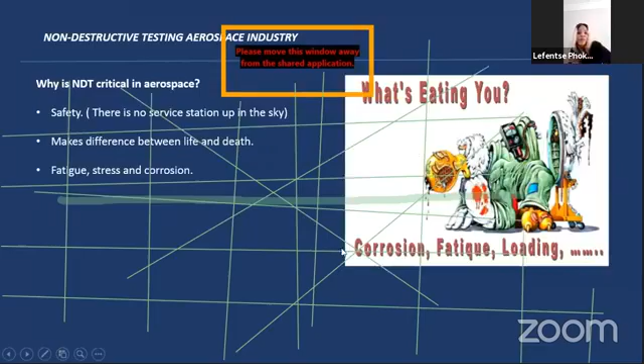What's happening with the screen now? Okay let's wait for the screen. Yeah, I think it looks fine, but there are lines there, I don't know what those lines are. Maybe somebody is drawing on your screen. Guys, please, let's not draw on the screen. If you are watching on a tablet or anything, don't touch the screen of the tablet, right? All right.

Okay, so now, when you look at an aircraft, it experiences a lot of turbulence in the air. So when it flies up there in the air, there is all sorts of temperatures happening, and also rain can affect it, and also lightning can affect the structure of the aeroplane. So when that happens, we know that when you use something, it gets tired. Even us, when we work hard, we get tired and we need rest. That's why we have the Sabbath day.

And also when you look at a car, you drive a certain number of kilometers, and when you reach a certain cycle of kilometers, they will tell you that the car needs to go for a service. So they need to check whether the car is still fine, nothing is broken, or there's nothing that can cause any accidents with the car. Same applies with the aeroplane. An aeroplane, when it takes off and touches down, it accumulates cycles, it accumulates kilometers. And then it needs to come back for service, so that it can be checked whether it has cracks or problems, so that when people fly, they fly very safe. So where do I come in as an NDT, non-destructive testing inspector?

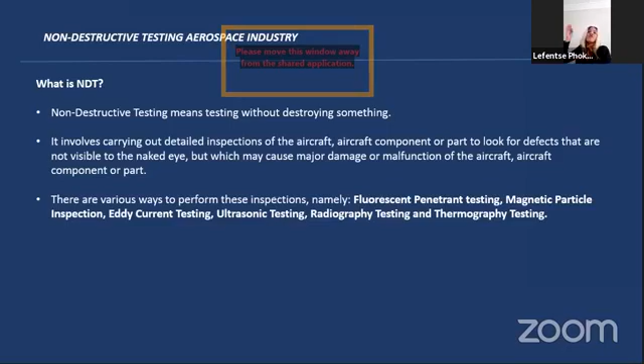So you have services like trucks that bring in food so it can get into the aeroplane, and you've got services like staircases, whereby after flying, when you disembark, you go down the stairs. Sometimes the aeroplane actually gets bumped by that, and it might develop a crack that people don't see with the naked eye. So what I do is come with my special equipment and scan the aircraft to see whether it's still okay to fly.

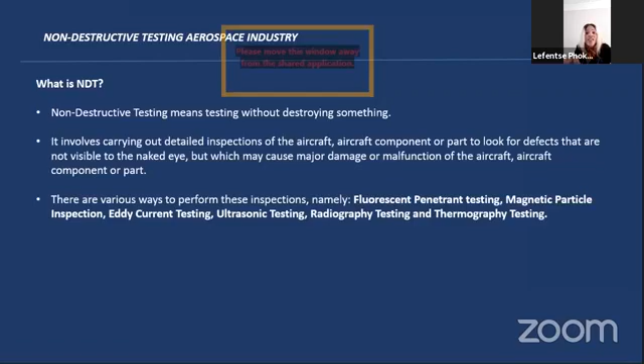So the methods that I use, there are 6 of them. I'm going to show you the pictures, but before that, I just want to tell you what those 6 methods are. The first one is penetrant testing. The second one is magnetic particle inspection. I know these are bombastic words, but it's fine, I will take you through step by step what they mean. The third one is eddy current testing. The fourth one is ultrasonic testing. The fifth one is radiography testing. And the sixth one is thermography testing.

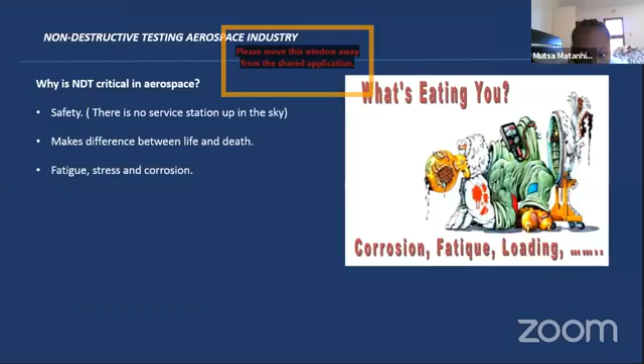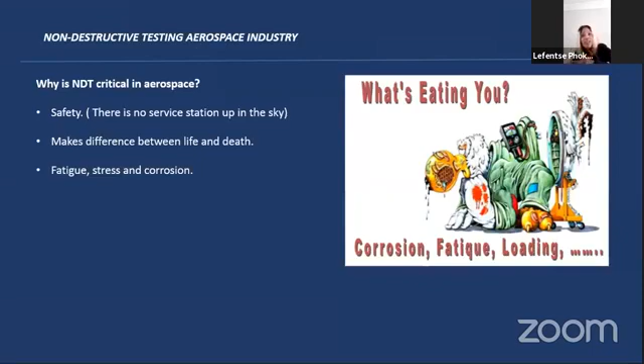So it means that if I am not there to inspect this aircraft, the pilot cannot actually have his aircraft and fly it. So without us as aircraft maintenance engineers, the pilot cannot have an aeroplane to fly with. So we have to go there with our tools and check whether this aeroplane is safe for flight, so that the aeroplane does not have an accident.

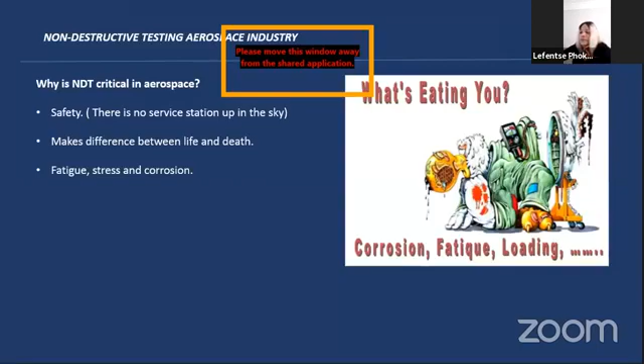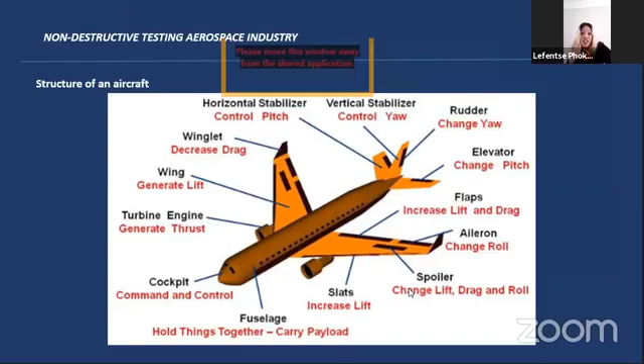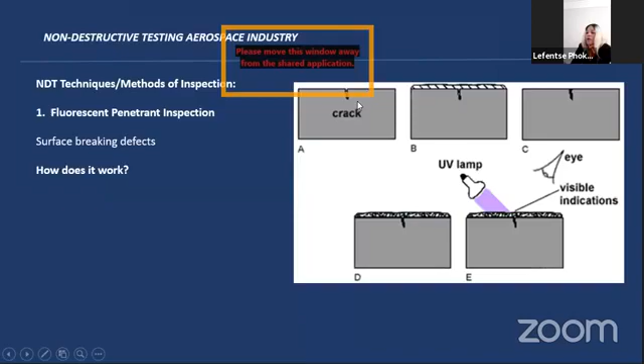When you see at A, it's a crack. So when it's cracked like that, what I do is I will perform a fluorescent penetrant inspection. Let's go to the next slide as I explain.

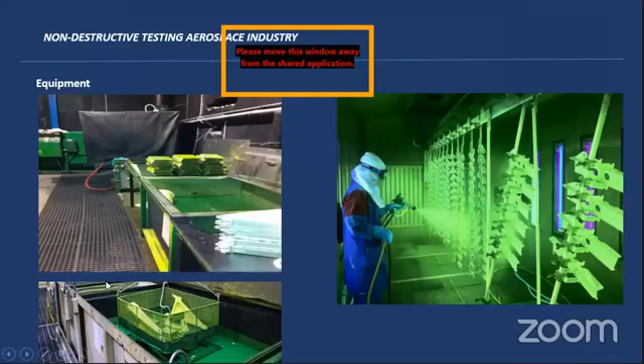So what I do is I will take those links, I will dip them inside that green thing, and then I'm gonna take them out. Or sometimes if it's a big component, I'm gonna spray them. You see that guy is spraying this paint on these components. So what I do is I will spray, or I will dip it in, and then I will wait a few minutes for it to dwell on the material.

And after that, I'm gonna wash away all the paint with water. Then after washing it with water, I'm gonna put it in an oven whereby it will dry. After drying, I'm gonna take it out of the oven. After taking it out, I'm gonna apply a spray called a developer. What is a developer? A developer is a white powder.

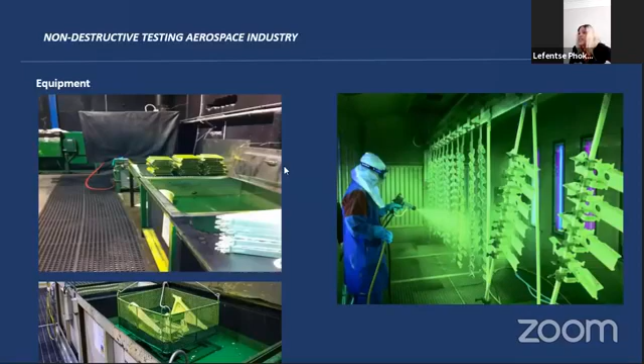I don't have it here on the picture, but can we go back to the previous slide so that I can explain the process? Yeah, so now when you look at B, I've applied that green thing. After applying that green thing on B, you go to C, and then C, I'm washing it off with water. After washing it off with water, I put it in the oven so that it's dry. After it dries, then you go to D. D, that's where you're gonna apply a spray again, a white spray.

So this white powder, what it does is it actually absorbs the ink that got into the crack. The ink that got into the crack, and then I'm gonna view the crack with a UV lamp, a UV light, and then if there's any cracks, that green thing will come up and you will see a crack.

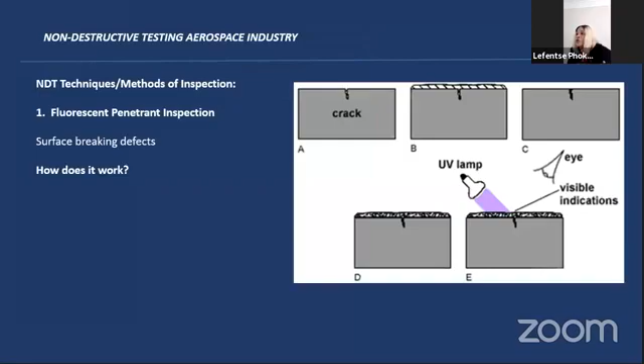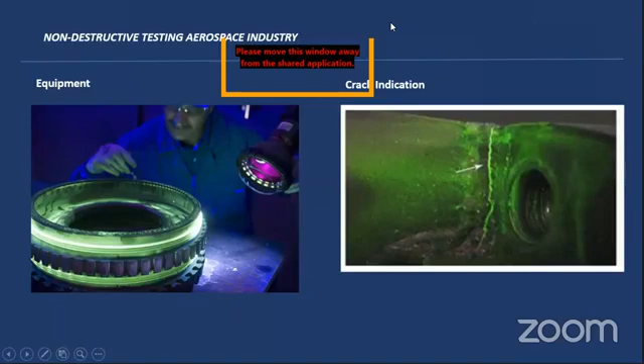Let me show you how it looks. Let's go to the crack indication. So as you see there, you've got a UV lamp, that purple lamp, we use it to check the crack. So what happens is the crack will become visible. As you can see on the crack indication on the right in the picture, there is a crack there.

And after I have found the crack, then I'm gonna write a report to say that this thing is cracked. It cannot go back to the aircraft, it needs to be fixed. So my job there is done. And when you look at the picture there with the person inspecting with the light, you can see that he is wearing gloves and glasses as well. He's wearing PPE, personal protective equipment, that is an overall.

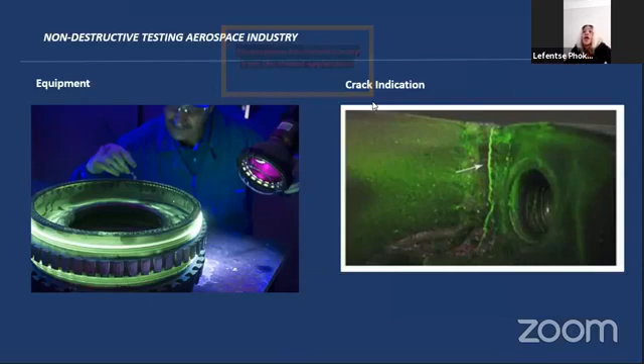You mustn't actually work with this thing with your own hands because it's a chemical. It can actually damage your hands. You might react to it, but it's not a harmful chemical, it's a safe chemical. This one is called liquid penetrant testing.

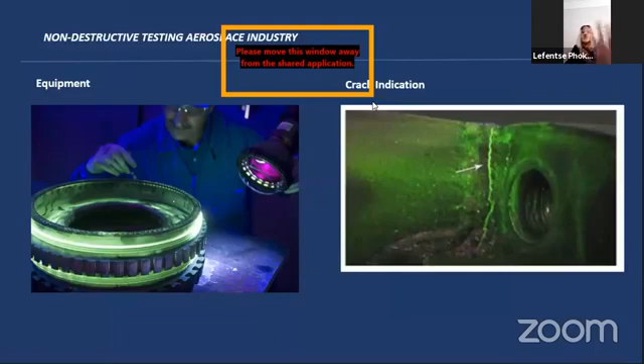Let's go to the second method. The second method is called magnetic particle inspection. These are very high words. So magnetic particle inspection means I am looking for a crack, but I am using magnetism, using a magnetic field to look for a problem.

When you go to the next slide, I just want to show you the machine, how it looks, so I can explain the process. So here is that guy standing there. What he's doing is performing magnetic particle inspection. This guy is holding a hose that has got a chemical coming out from it.

This chemical is made up of iron filings, and also that penetrant, they mixed it together. I think it's like paraffin, it smells like paraffin. It's paraffin and iron filings.

So there you can see there's a round big thing there. Please go to that round big thing. Yes, that thing is a coil. A coil, what happens is you've got a lot of conductors. I don't know how to explain it simply, but that thing is used to generate magnetism to the part that we are testing.

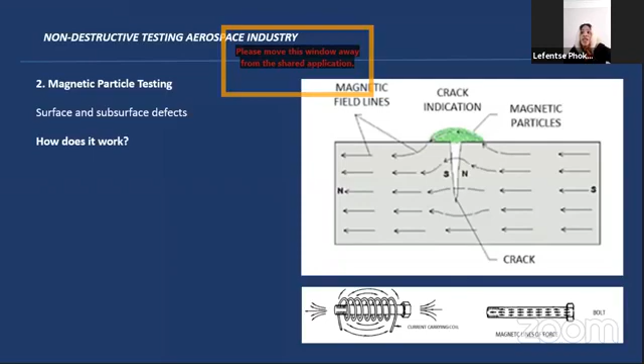And with this one, we look for cracks that are subsurface. So they are not only on the surface of the material, but inside also. Yeah, those are cracks there. Those are visible cracks there.

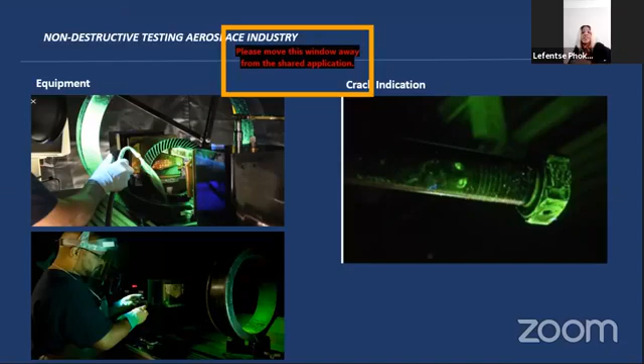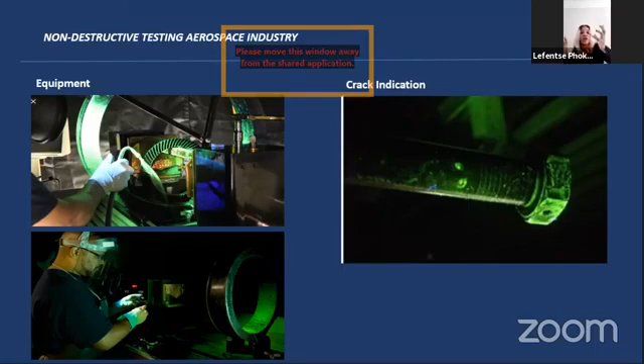After we do this, remember that we have magnetized the component, and it's full of magnetic fields. So before it can go back to the aircraft, we will demagnetize it so that it doesn't affect the instrumentation of the aircraft. That is the second method.

The third method is called eddy current testing. I love eddy current testing because you don't get as dirty compared to the previous two methods. So let's go to the next slide.

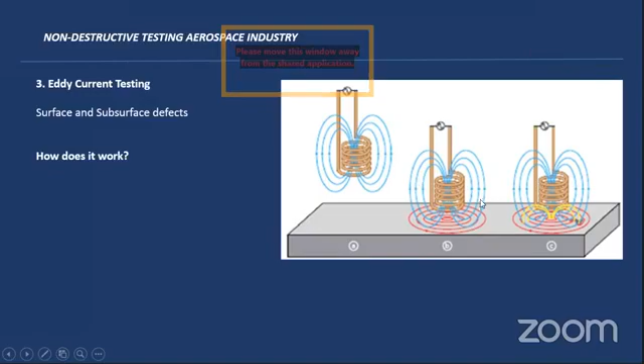When it comes in contact with an aluminum plate, it's going to create eddy currents, and those eddy currents are in red. Can you see the red there? Yeah, they are circular. When they are circular like that, it means that if there is a problem, a crack, those circular eddy currents will be disturbed. When they are disturbed, go to C. When they are disturbed, they're going to create their own magnetic field also, that yellow thing.

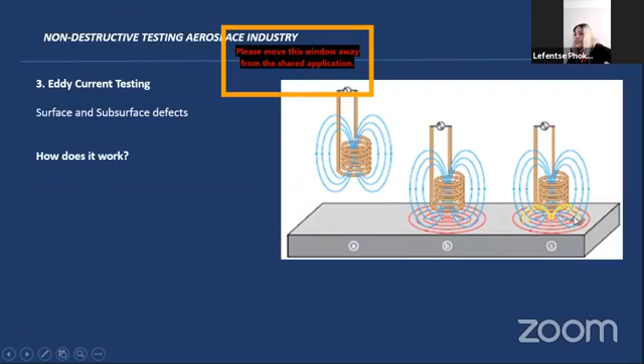So that magnetic field, the yellow one, will affect the blue magnetic field, and then you will have a crack. You will have something like this on the screen. Go to the next slide. Yes, that thing, that peak on the screen, that's a crack. But if a crack was not there, it was just going to be a line. Go to that line on the side. Yeah, it was just going to be a line on the side.

So that's me there on the right-hand side. I'm performing eddy current testing. I think it was on an Airbus A340. Yeah, one of the Airbuses. So what I do is I will look for cracks there on the skin of the aircraft around the fuselage.

This one, I like it because the results, you get them the same time. You don't have to wait for a long time. What you see is what you get. You can't even miss a crack with this one.

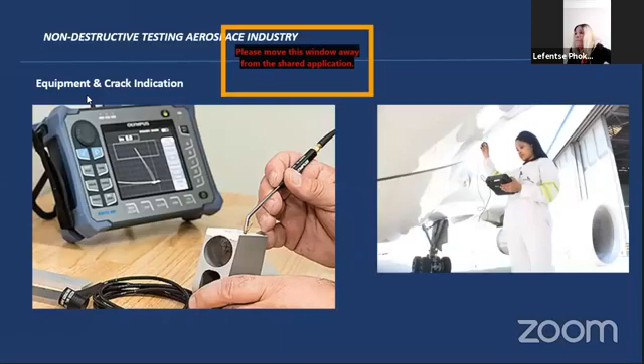And the fourth one, it's ultrasonic testing. This one, it's a bit complicated. So what is ultrasonic testing? So ultra means high, sonic means sound. So what we do is we are putting sound into the material and we are looking for cracks in it.

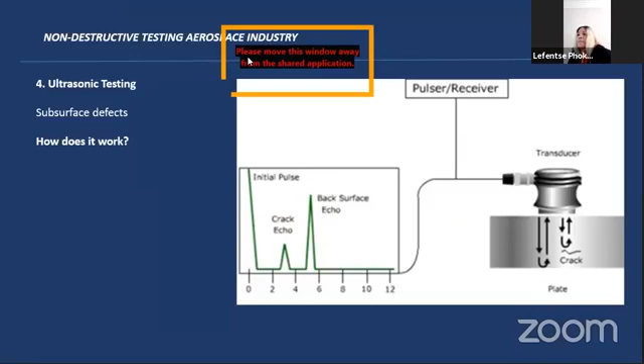So this is the ultrasonic machine. This is the ultrasonic machine.

An aircraft flying might experience a lightning strike, maybe while there's rain. When it strikes, that material becomes hot, and up there it's very cold, so it's hot and cold. This changes the structure of the aircraft material and it becomes weak. So when it lands...

The structural worker will go and inspect the lightning strike. After inspecting it, they call me to come check if there's a crack. When I see there's a problem, they will blend it—remove whatever crack or corrosion is there. After removing it, I come with this equipment to see how much material was lost, and check if it's still safe for the aircraft to fly with that material eaten away.

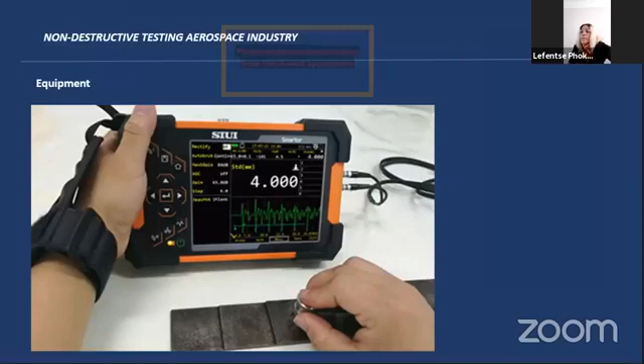So this is ultrasonic. The fifth one is the most complicated—not complicated per se, but dangerous: X-ray radiography testing. X-rays are very dangerous, they can kill you or harm you.

Before we operate these X-rays, we remove everyone from the hangars—the big buildings where the aeroplane goes and parks inside. I didn't actually put an image for the hangars.

So can we go to the next slide before I explain the operation? What have I done before I explain how? That means I can speak.

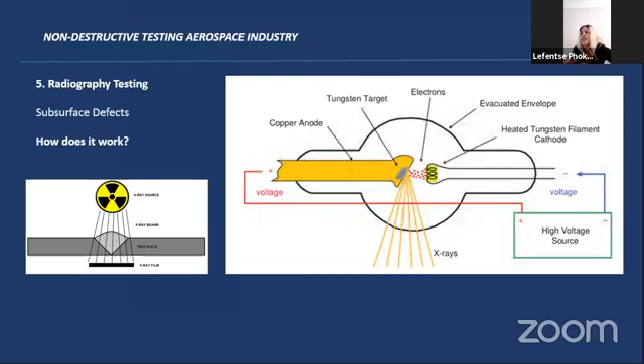The last one is thermography testing. Thermo means heat, and graphy means photo, so you've got heat that you're applying and a camera that actually looks into the material you're testing.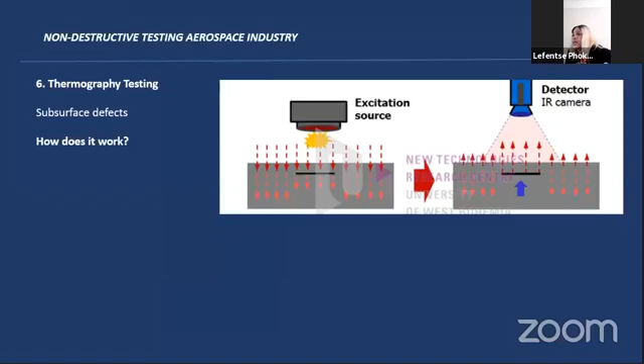What happens is when the aircraft goes up, it's freezing up there, and down here it's hot. So it's hot and cold repeatedly. This creates water to be present inside the honeycomb structure, and when there's water inside, now there's a problem.

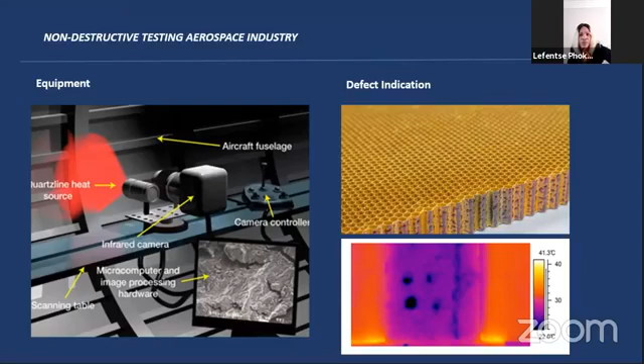Yeah, so this is the infrared camera that I use. It works on the basis of checking temperature differences. So if something is too hot compared to what it's supposed to be, we'll know there's a problem there. And if it's too cold, we can also see if there's a problem. So in a nutshell, this is what we use to actually look for problems.

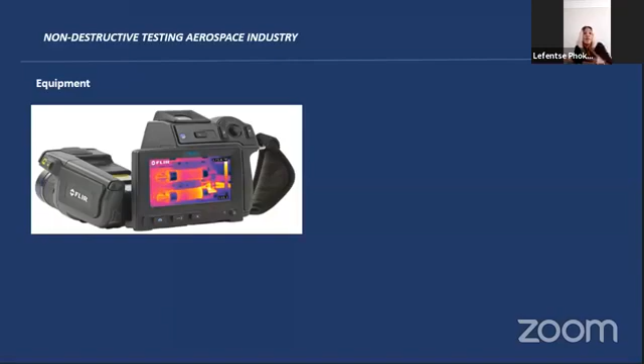We are looking for these problems because we want to save people's lives, and we want to make sure that everything is safe, it's defect free, so that people can have a safe flight, so that even the pilot, when he flies his aircraft, feels comfortable to say that this is serviceable, it's in good condition, I can fly it.

And what I do is I just look for those problems and report them, and I save people's lives, because I believe that what I do is very critical. Because remember, if I miss a crack, the aircraft is going to fly up there and then it's going to crash, because a small crack can actually expand to be a big thing, since there's high turbulence up there and there's pressure and all sorts of things.

So I'm hoping that I've done justice in trying to explain the complexity of what I do. So in conclusion, NDT is very critical, especially in the aerospace industry, because now we are going for fiber airplanes, we are doing away with steel.

So we're going to do a lot of inspections such as this thermography and ultrasonic on the aircraft. So in a nutshell, that is what I do - non-destructive testing. You are testing something without destroying it, because we want to use that thing after we have actually tested it. And yeah, that's it. God bless, I hope I've done justice, and I'm ready for questions now.

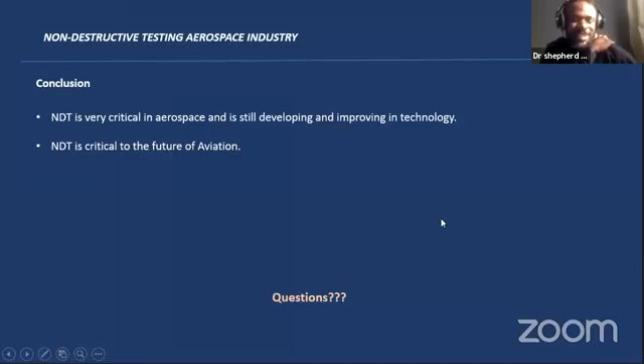It's like you're speaking like you ate your lunch. You don't sound hungry at all.